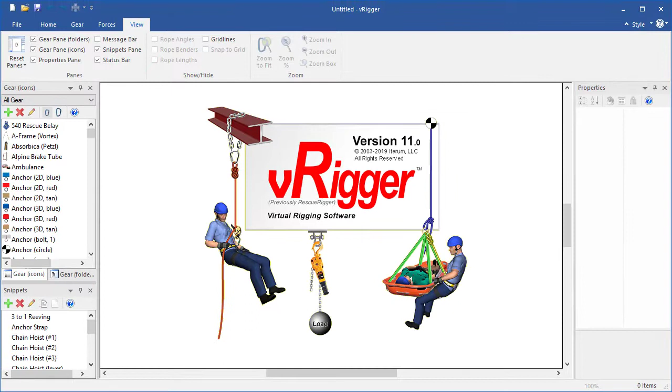VRigger helps you design, test, and teach rigging. This short video will give you just enough information to start using VRigger, but be sure to visit vrigger.com/videos and to use the VRigger Learning Center.

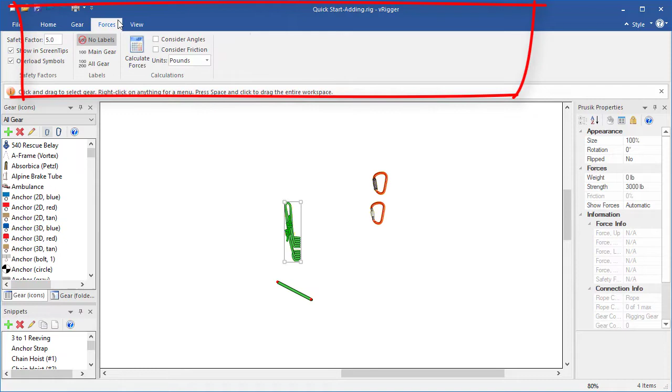VRigger is divided into several areas. The center of the screen is called the workspace. That's where you'll create your rigging systems. The toolbar at the top of the screen uses tabs to group commands. A message bar is displayed just below the toolbar. It displays helpful instructions as you interact with gear.

The gear panes are displayed on the left side of the screen. They provide one method of adding gear to the workspace. The Properties pane is displayed on the right. It lets you modify gear that is on the workspace.

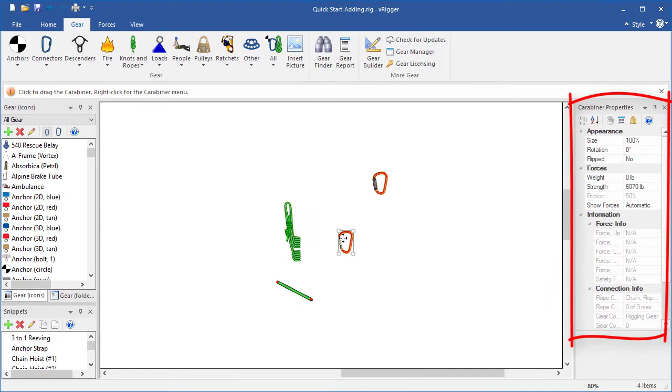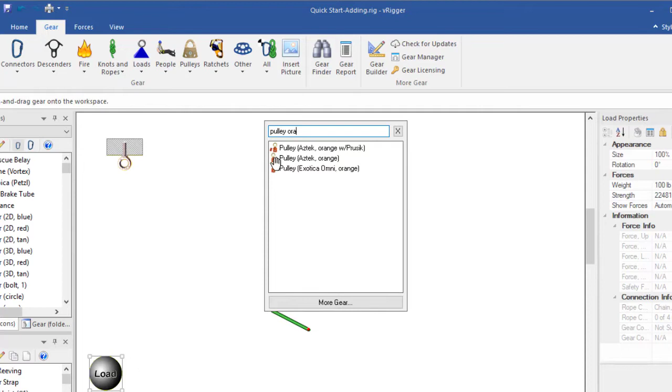You can add gear to the workspace by dragging it from a gear pane, by selecting it on the toolbar, or by using the Gear Finder. To use the Gear Finder, you simply type a portion of an item's name and then drag the gear onto the workspace. Separate videos explain these three methods of adding gear to the workspace, but the Gear Finder is definitely the fastest.

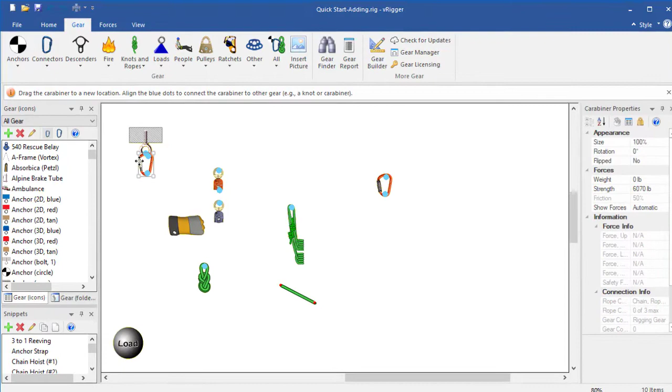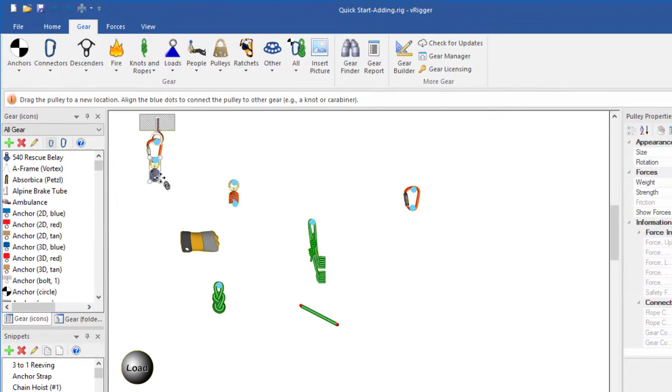To connect gear, you drag it with your mouse, line up these blue connection dots, and drop it. If you drag a piece of gear that is connected to other gear, only that item will move. However, if you press the Control key and then drag the gear, the connected gear will also move. To connect ropes to other gear, you simply drop the rope on the gear. Note that you can't drop gear on ropes to connect them.

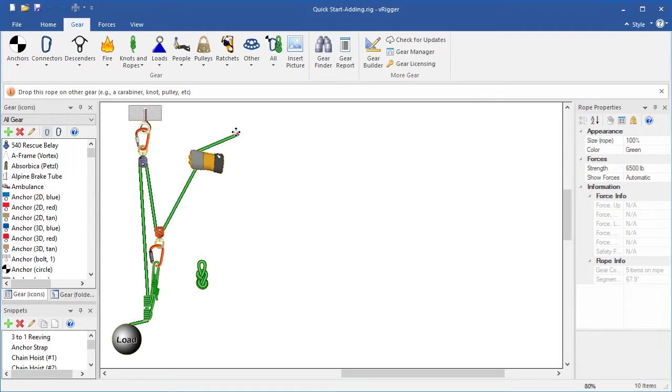VRigger can calculate the forces in a wide variety of systems. To calculate forces, click on the Forces toolbar and then click on the Calculate Forces button. You can see there are many options in the Forces toolbar.

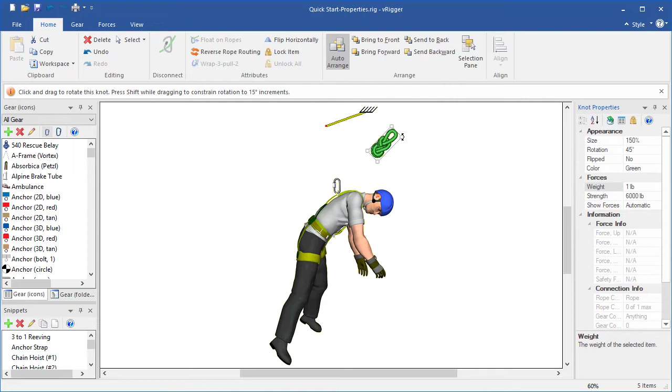The Properties pane lets you modify the selected item. For example, if I select this knot, I can change its size, its rotation, its weight, and its strength. You can also change an item's size using your mouse, and you can rotate it with your mouse.

It is best to use the zoom commands on the View toolbar to change the visual size of all of the gear, and to only use the size commands in the Properties pane to change the relative size of an individual piece of gear.

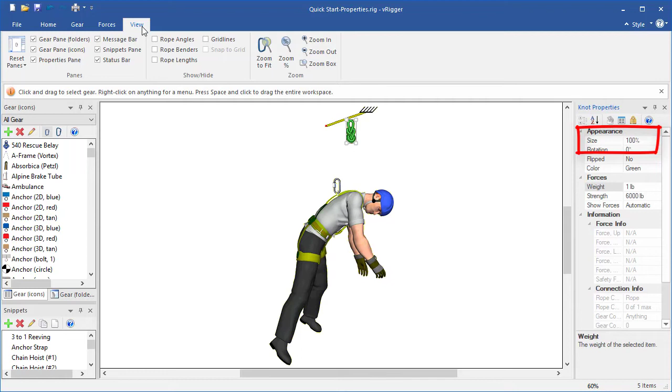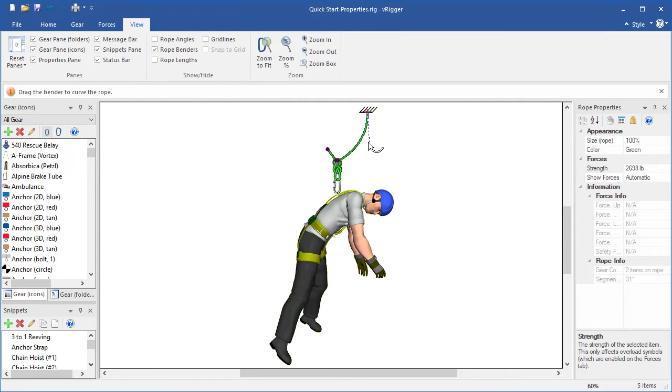When a rope is selected, you can change its properties, including its color and strength. There are several commands in the View toolbar that deal with ropes. One of these commands is Rope Benders. Rope benders let you curve the rope, creating the appearance of slack.

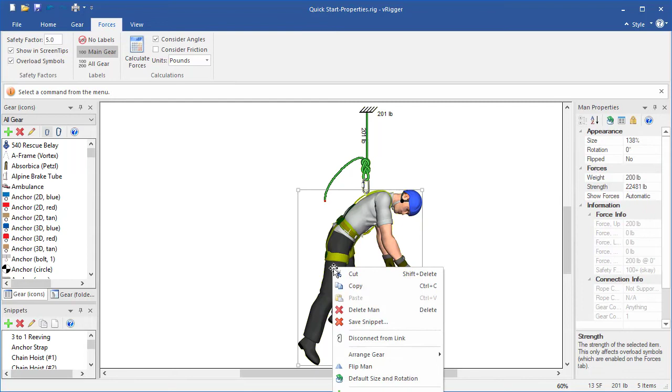As with most Windows-based software, you can click your right mouse button on objects to display commands that are relevant to that item. If I right-click on the rope, I see commands that are relevant to ropes. I can even right-click on our unfortunate man. I can click on the workspace for workspace relevant commands, on gear within a gear pane, on commands within the toolbar. I can even right-click on the status bar to choose what it displays.

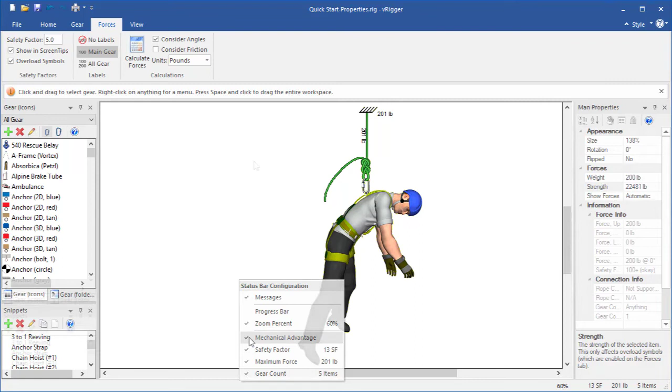The advantage of using right-click shortcut menus in any Windows software is they provide quick access to commands specifically relevant to the item you clicked. There is a lot more to VRigger than was shown in this short video. If you ever have a question when using VRigger, be sure to press the F1 key and search the VRigger Learning Center.